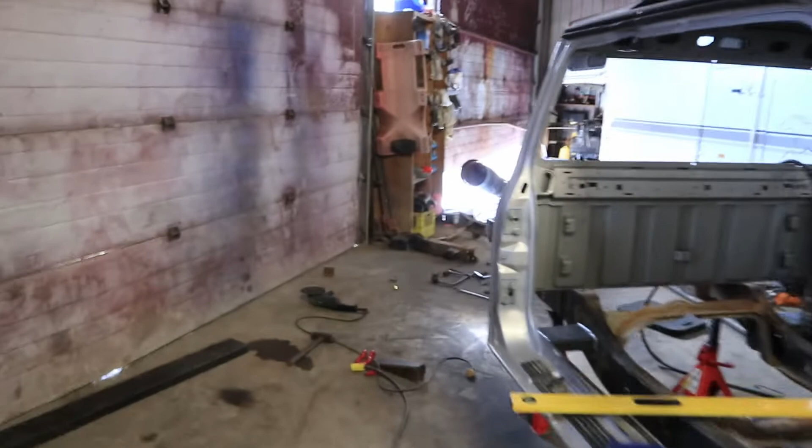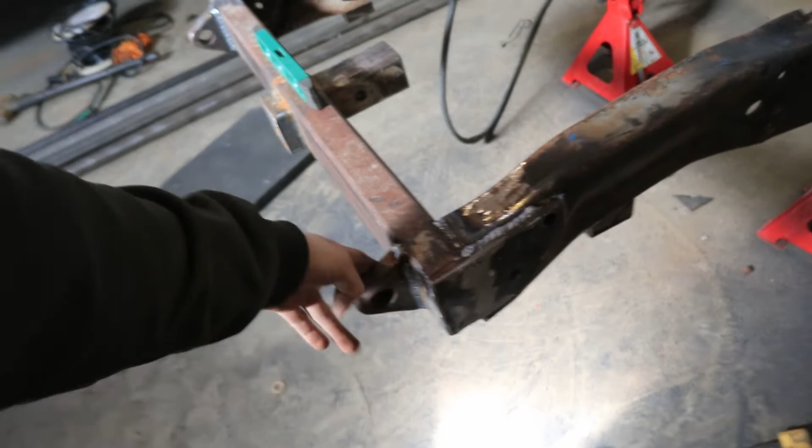Now we are continuing work on our 2000 Ford Ranger. In the last video you may have seen we rebuilt the front winch plate and cross member. We shortened the frame and made our rear bumper work again. Re-welded our eyes on for the shackles. Now today we are building the roll cage.

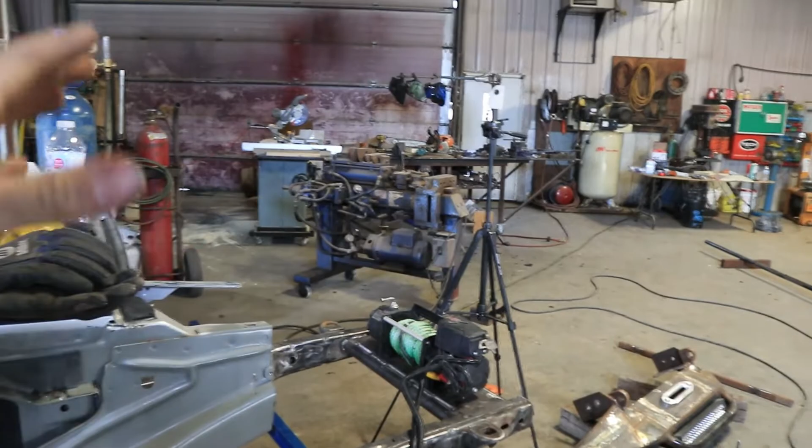So we have 1 3/4 120 wall tubing. So me and Jake are going to cut it. We're going to be using that big blue bender right there. It's a ram style bender, and we'll be building our cage.

So what we're going to do first is we got to work on the main hoop that'll sit at the back. It'll come up, make this 14-degree bend, come up, make a 76-degree bend, and then we'll make it the same on each side.

Try to build our hoop that we need, but we're gonna start by cutting a 2-foot length of tubing, and then, because we have the option, we have a 6-inch die, which is in here, and we have this big 8-inch die here. And if we can, we'd like to use the 8-inch die, just to make our corners look a little better. It'll look prettier.

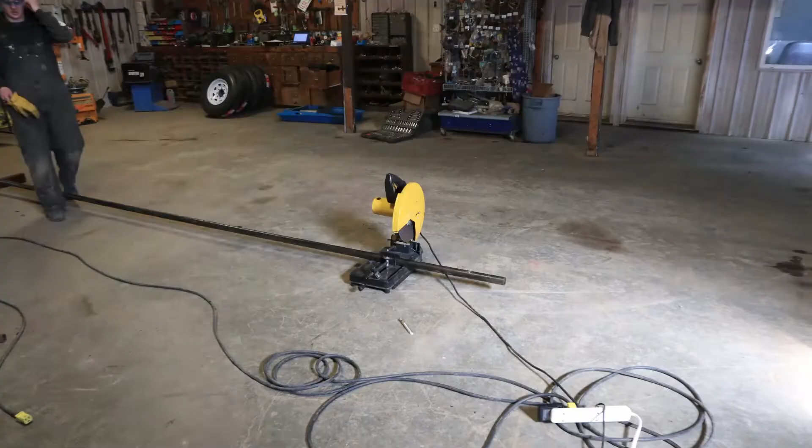So we've taken some measurements already, but we have to get this quick bend just so we can see what kind of bend we'll be working with, and then we'll show you guys how that's going to fit into the cab. All right, so with our ram style bender here, that's the kind of bend we got. And that is our 76-degree bend. That is pretty much what we're looking for here.

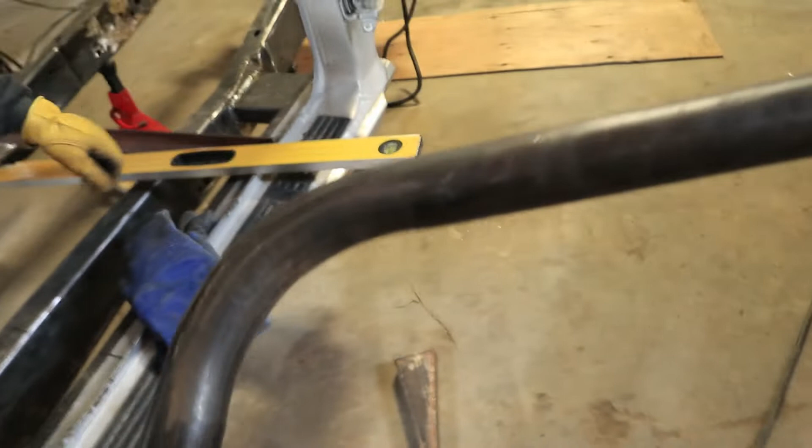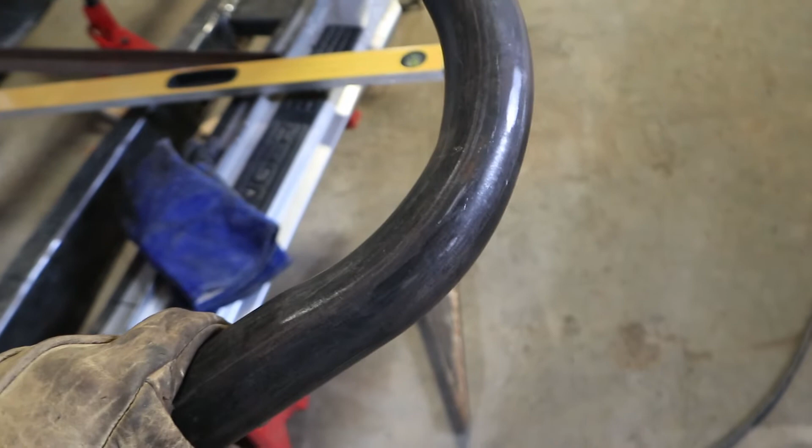This is just a tester so we can see where we need to mark, but I think that's pretty fucking perfect. What do you think, Jake? I think that's right on the money. And with this, it's gonna indent the inside of the bend, just a style of bender, but it's plenty strong and it doesn't hurt the pipe at all. And it doesn't really look awkward either.

So what we did here is we found center on our die. We've marked it so we have a good line of reference when we're lining up our tubing. Everything will come together. We did our 76-degree bend, and then we did a slight 14-degree bend. Made sure that our bends are nice, and then we can actually go and figure out where center is going to be here.

So I plotted everything on our computer over there, but we've also drawn it on paper here. So from the center bar, we're going to go out 20.75 inches. That'll be a mark. That'll be a 76-degree bend. Then from there, it's 18.6 inches from this bend out to our 14. We'll have it marked there.

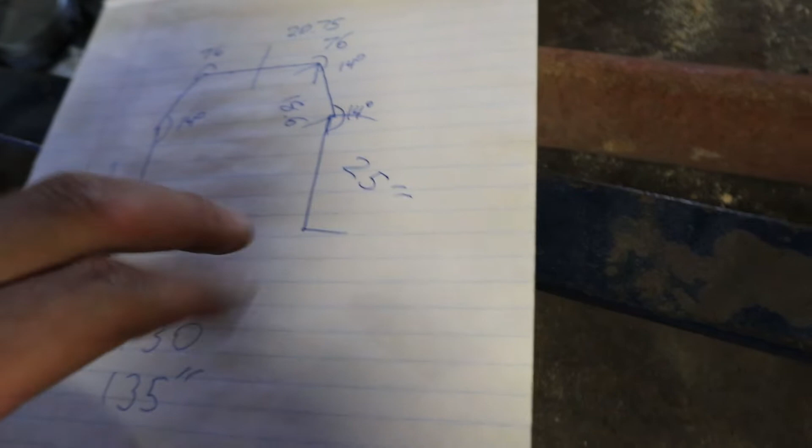We know we're 25 inches down, but we're going to leave those a little bit longer because we can always cut and just make it perfect when we need it. So we're going to go ahead, cut a 135-inch piece. We'll mark it, and then we'll get to bending.

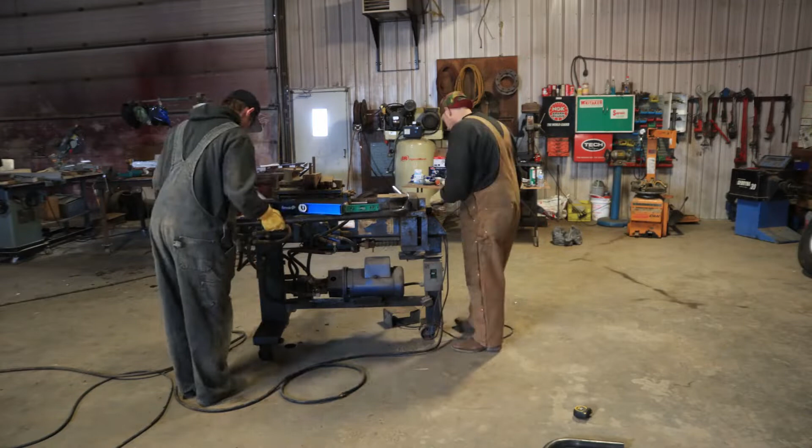Okay, so we made a little mistake here. We're going ahead, we're going to cut a new piece for our main hoop. Now, our bends actually turned out really nice. The one did end up kinking, so we weren't too happy with that to begin with. And then we figured out that we made these too long.

So we made them 18.6 inches, and they should be about 16.5. So we're going to go ahead, cut a new piece, mark this out, and bend again. Even though we kind of had that one already fucked, we just wanted to bend it, make sure that we knew what we were doing, because I can always cut this up and use this for gusseting. So we have lots of tubing. We want to make sure it's right, because this is the backbone of the whole thing.

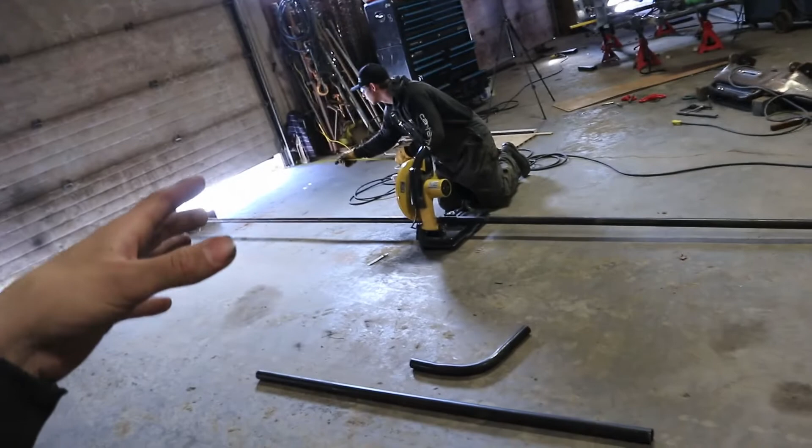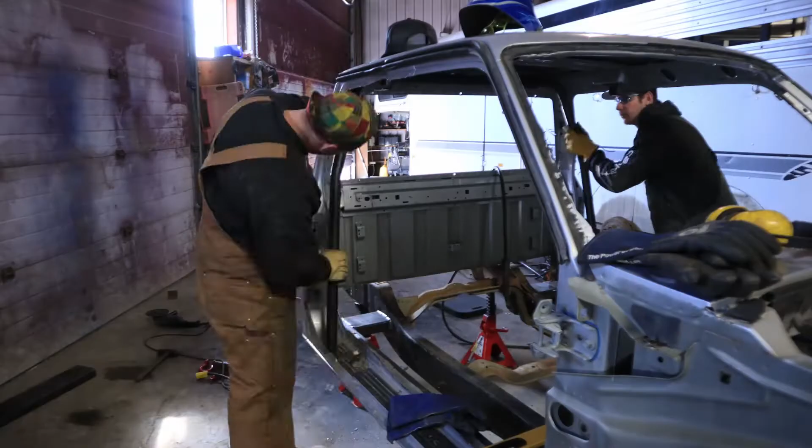So we're going to do this. We'll time lapse again what we're doing and then show you once it's in. So there we go. After 4 attempts and about 4 hours, we now have our rear roll bar in place. So it is really dark. We'll try and brighten this up for you. There, she's in. It's nice and tight.

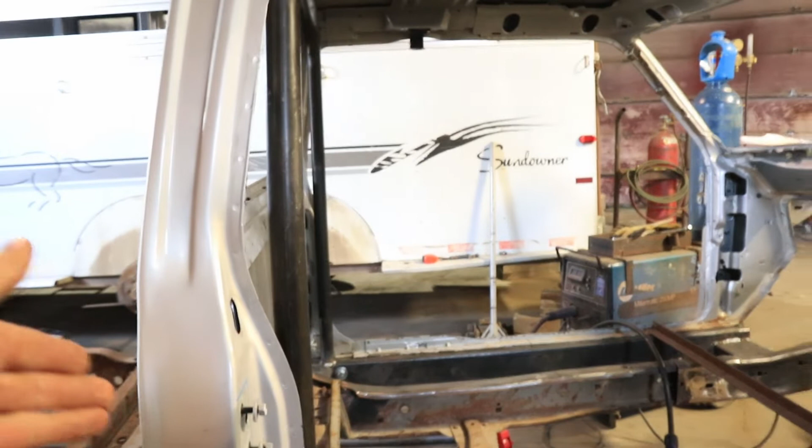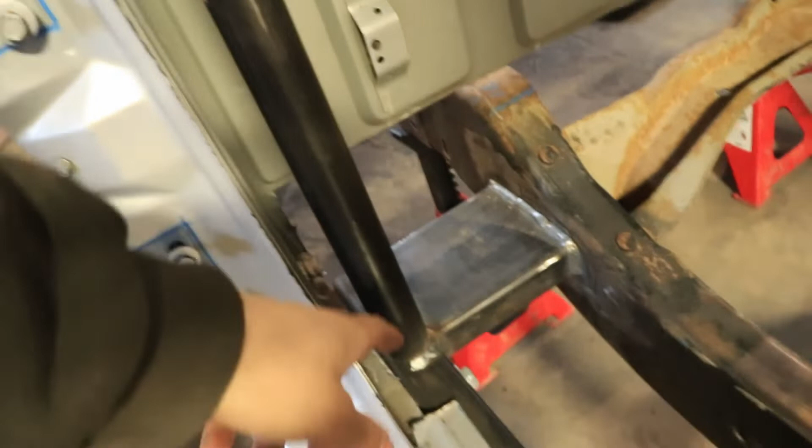So it's perfectly vertical or perpendicular to the frame. It is level. It's tucked up here really, really tight, which is what we wanted. It's half welded at the bottom. Just for now, we'll do that until we pull the cab off. But we had some issues with our tubing bender. So these are the failures of our day.

What it was doing was it was actually kinking instead of rolling the tube. So we had one that actually was good, and then we had just a bunch of kinks. So it really sucks. We tried to make it work, but we just couldn't. Yeah, there's some leaks going on here, but we were low on pressure, so it wasn't squishing the tubing like it should have, and that's what caused our issue. But we got the back roll bar in.

We're hungry as hell, so we're gonna go have some steak. We'll come back and we'll do more cage here tonight.

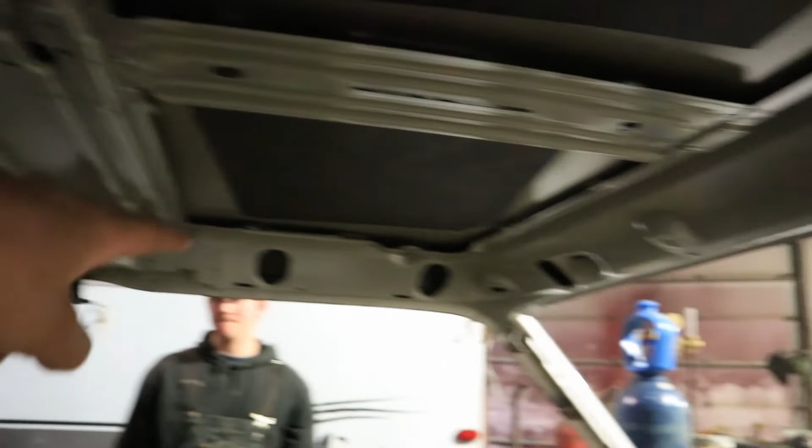Okay. So we have our main hoop in. Now what we're going to work on is we're going to come from the hoop, we're going to come across to our A-pillar, come down our A-pillar, and then down there to our frame rail, or cab rail. We're going to build those, and then we're going to make 2 identical, one for that side, one for this side. We'll get them tacked in, and then we'll work on crossbar here, and then probably that'll be it for tonight, so we'll get to work.

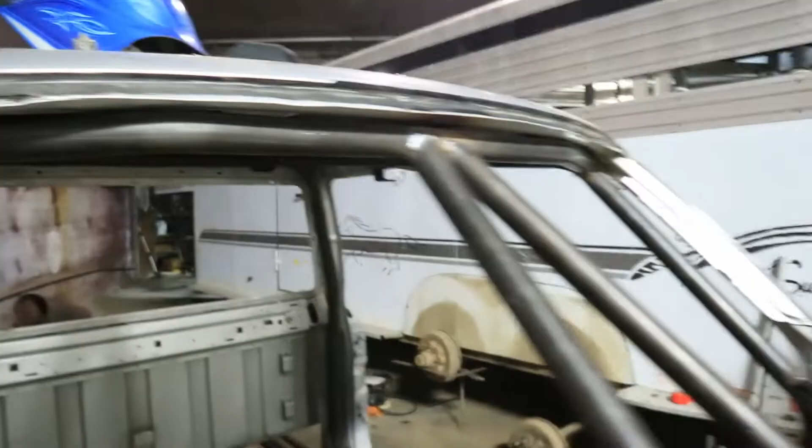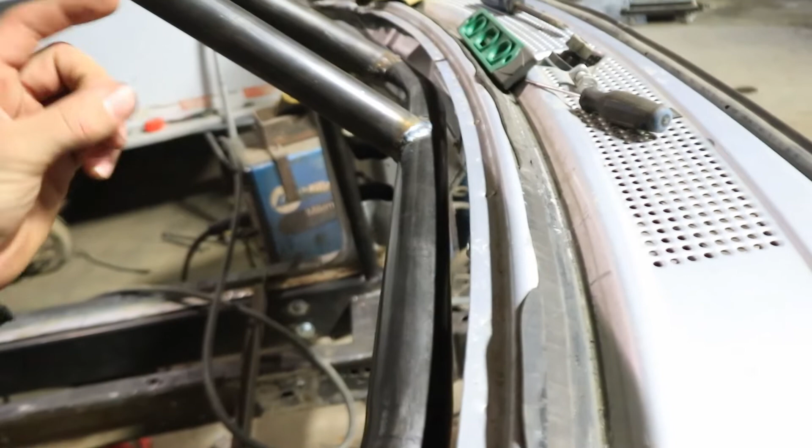Okay, update here on what we've gotten done. From the front, we have our, I don't know, we'll call them rollover windshield bars in place. Those were actually really easy to do. We have our top windshield bar in. We also have the lower windshield bar. Now this, we did 3 bends. It was a 20 and then some 25s on each end. The top, it's pretty much just a 20 and then a slight 5-degree bend in the center.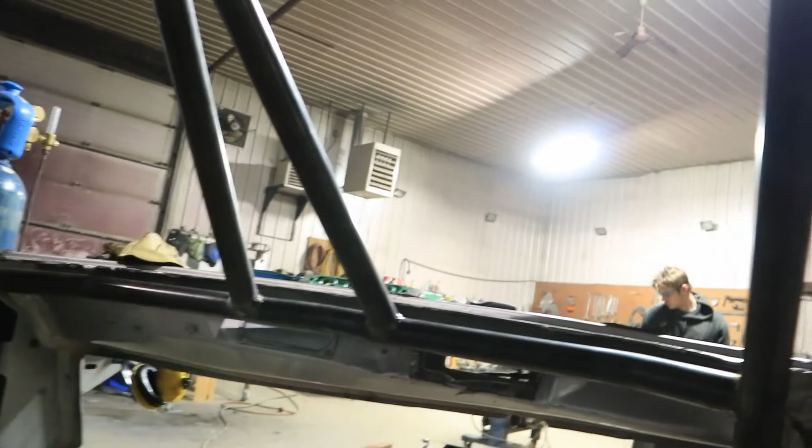But it's all welded. The rollover bars or crash bars, whatever you want to call them, they're fully welded. We got most of these other ones welded in as well. Just when we go, we'll pull the cage and that'll give us access. We'll get everything else like these top corner ones all welded in, but looking really good.